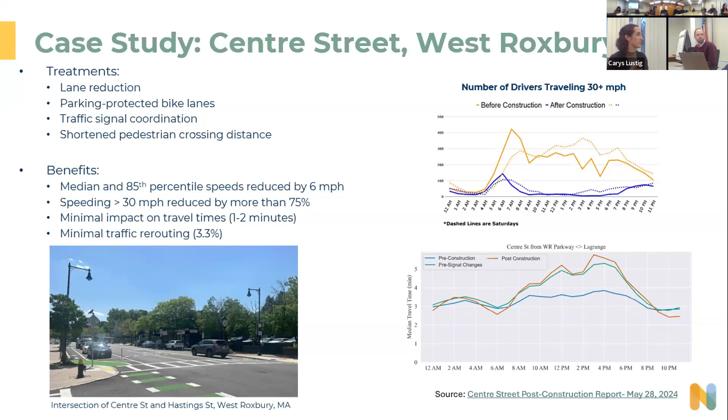So in terms of... sorry, just a question. Yeah, of course. When you were talking about revenues increasing 100%, could you explain more about what they are measuring? I can't give a specific answer right now. We do have a link to the source, so I can get that specific information and share it after the meeting. Yeah, sure. That's great.

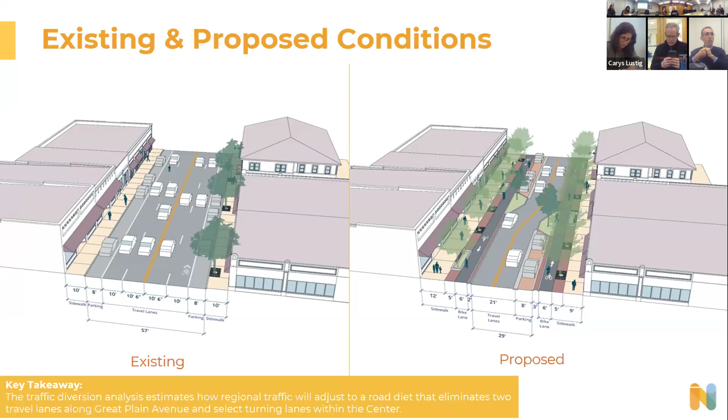Our analysis is based on a number of assumptions. First, that there is a road diet within the center. We're talking about reducing Great Plain Ave from 4 lanes to 2 lanes, one lane each direction, eliminating all turning lanes within the center along all approaches, with the exception now of Chestnut Street, based on our earlier conversations and analyses on the impacts of Chestnut Street being a single lane approach, and the fact that the fire station is right along Chestnut. We're keeping Chestnut as a 2-lane approach the way it is today, an exclusive left turn lane and a through lane.

We are assuming that the exclusive pedestrian phasing will remain in effect in the center. By this, I mean when a pedestrian presses the push button, all traffic at the intersection stops, allowing pedestrians to cross while motorists are totally halted.

We are also anticipating some opportunities, based on traffic signal timings during the pilot, to somewhat monitor and control what the traffic diversion volumes might be. This could be done by altering signal timing, green time, etc., between the different phases. We are assuming that any portion of traffic above the capacity of that approach will seek an alternate route. Lots of things influence this, such as the amount of green time facing that approach, or the amount of friction expected to be encountered.

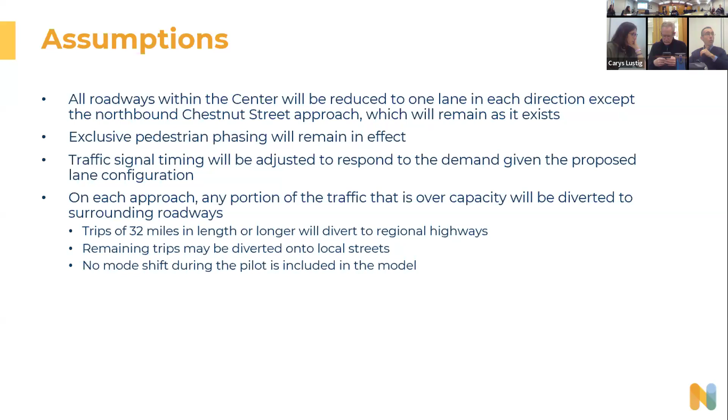So we have a three-phase process. First, we are estimating how many trips we anticipate being diverted from Needham Center itself. Second, looking at the alternative routes those motorists might travel to go around the center. Last is identifying locations along those travel routes to collect traffic data, again before and during the pilot program.

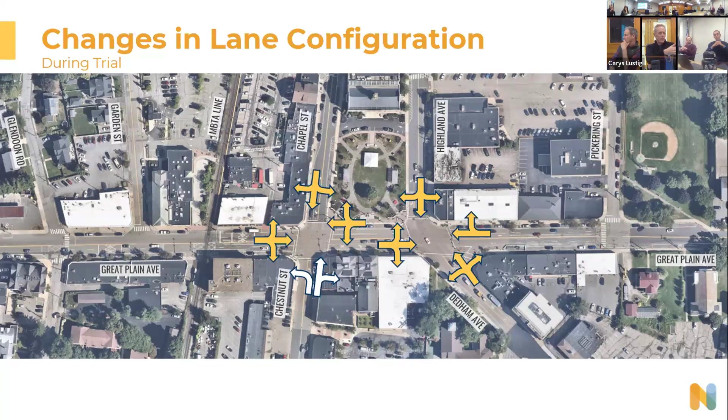What about the idea of doing a little bit of it now, but with a delayed green? So this clears, then they get at least 4 or 5 cars through the intersection trying to turn left before the oncoming traffic basically stops the lane.

I don't know how much more you have to present, but beyond these, it's 2 lanes in every direction. I'd be curious to know that context, like you only go one more block and you're down to 1 lane in every direction, and everyone's making those turning movements. You go 2 more blocks at Webster, and there's 1 lane in each direction. Unless we all agree that doesn't work and everyone wishes it was 2 or 3 lanes wide, that context would be helpful, because otherwise it seems like such a big deal.

Needham is like a functioning roadway network. So that might be helpful for the storytelling aspect of this.

Both Marked Tree and Webster have a lot of left turns there, a lot of people turning left on Marked Tree. Even going one more block in both directions, everyone is already navigating left, right, in, out, four-way intersections. With the exception of one of them, none of these are dedicated turn movements, so they don't have the benefit of being dedicated. You're already having people going straight and turning in the same space, whether it's right or left. And there's no driveway there, we're not dumping 1,000 cars on this one block making these unique. So it actually just gives parity to what everyone is used to. That's what I see when I look at this.

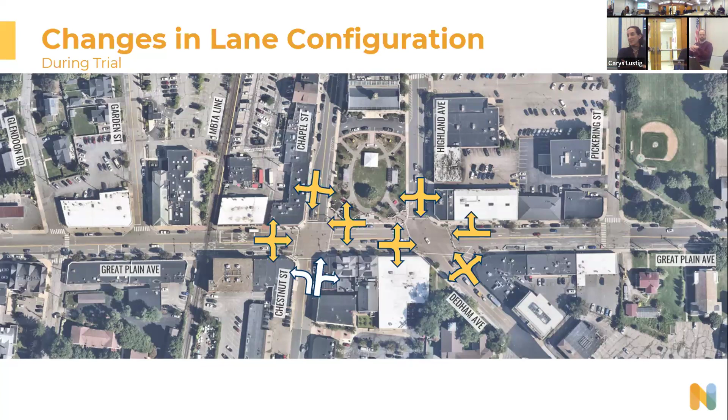So, based on the assumptions that I had discussed earlier, we reanalyzed for the pilot program to understand what percentage of traffic and number of vehicles would be diverted from the center with the reduced number of travel lanes cutting through.

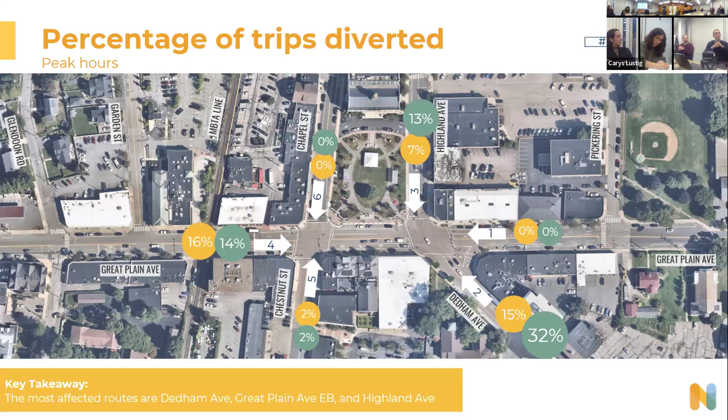If you recall, last time there was a substantial amount of traffic being diverted from Chestnut Street, which is no longer the case. Right now, the greatest percentage is during the evening peak hour. AM is orange, PM is green, so the largest percentage of traffic being diverted from any of these approaches would be 32% during the evening peak hour of Dedham Ave.

And if we look to see what that equates to in number of vehicles per hour, that equates to 32 vehicles per hour. You can see kind of a rebalancing between the percentages and the number of vehicles here. So if we look at number of vehicles being diverted, the most would be in the eastbound direction in the morning, 73 vehicles.

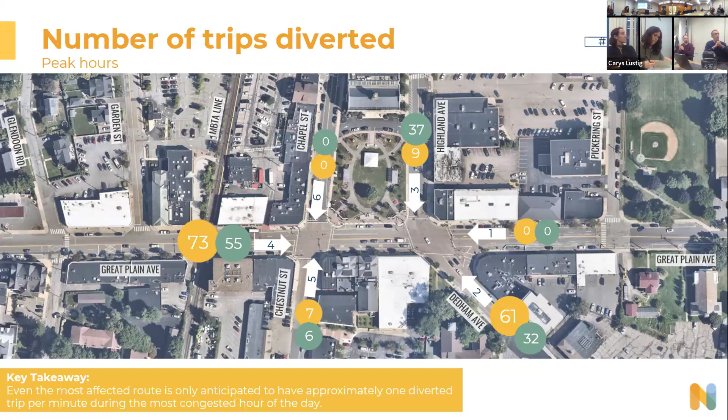Now, what does that equate to? Really, that would only equate to one vehicle every 50 seconds being diverted to alternate routes, of which there could be a number. So in the end, it's not a substantial amount of traffic being diverted from the center. And again, we're looking here at the morning and evening peak hours when we would anticipate things being the greatest, the worst case scenario.

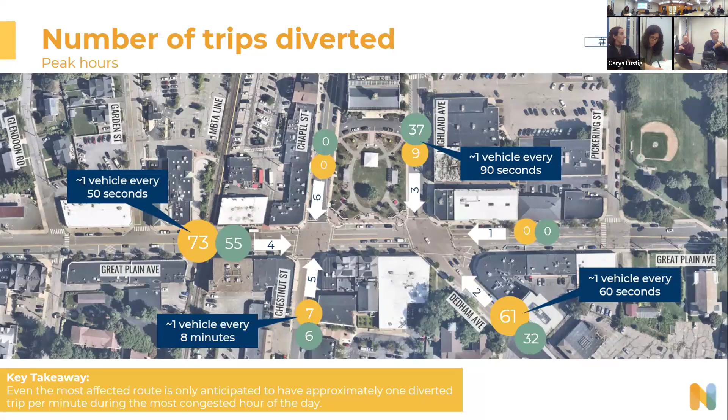Just looking at what the most diverted routes would be, it would be eastbound Great Plain Ave, combining with Highland Ave, heading down Dedham Ave, more so in the morning. Then in the evening, the opposite, coming up Dedham Ave, turning left onto Great Plain Ave westbound or Highland Ave northbound.

Lise, did you have a question?

I did. So I was telling my family last night that I had this meeting today, and I have a couple young adults and my husband, and they just kept going, 'but I don't understand, where are all the cars going to go?' And I was like, oh, we're going down to a single lane, that's going to be a pilot. And they're like, but the cars are coming from Wellesley. And I was like, well, they'll do Route 9. I could not come up with a good answer as to where all the cars would go. And you're saying only 70 cars and only one per 50 seconds. That seems like a lot of cars.

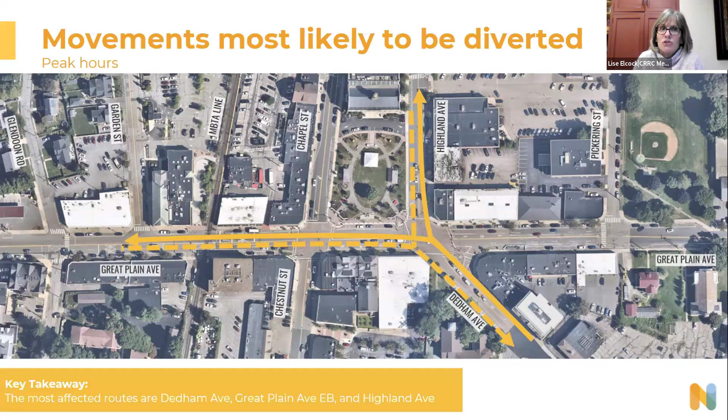And to be honest, I can't believe there's only almost 500 cars coming through at peak hour. So to me, this is a lot of information that I have to try to process. Where are those cars going to go?

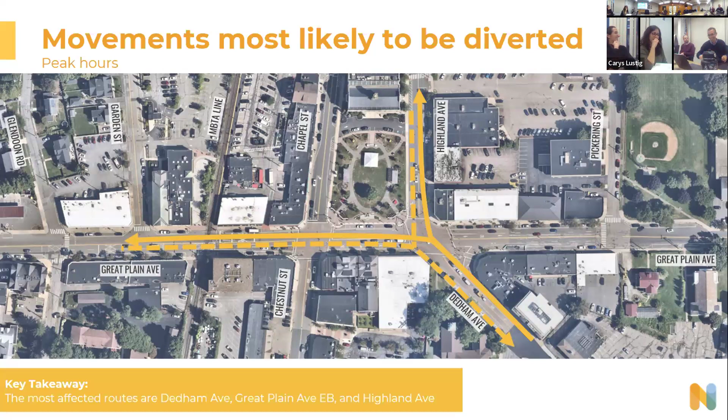Is that the next slide? That's actually a good segue. I swear we didn't plan this. And I need better answers because they're a tough crowd.

Okay, all right, here it comes. Emily, you're up. Yeah, thanks for teeing that up. I'll just say first off, everyone, I'm Emily Koehle with Toole Design. I think Lucy Gibson maybe has been at these meetings in the past, but is on vacation this week, so I'm subbing in to present this information to you. She did a lot of this analysis, and I kind of supported her with some of that. So if you have any questions I can't answer, we'll definitely follow up and get back to you. But hopefully these slides are thorough and we can talk through where all those people are going.

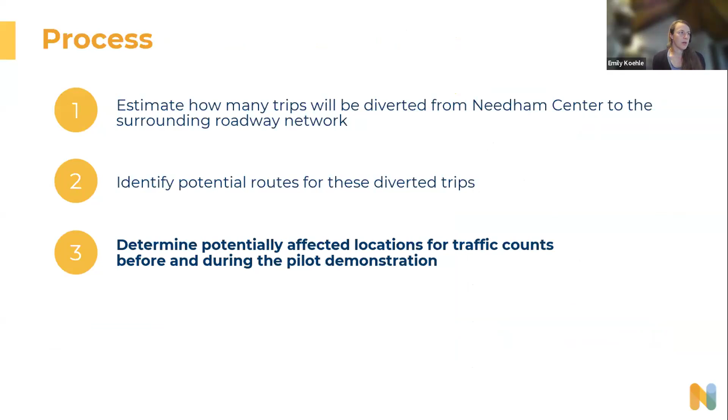That 55% of trips are commute trips, work trips during the AM peak, and then 28% of trips are longer than 32 miles. So again, looking - I think we'll still talk a little bit about the potential routes, but then just noting again that goal of determining the locations for traffic counts before and during the pilot.

So Highland, we're assuming, will have local trips that need to divert. All of the other approaches - all of the trips that need to divert can be from those trips over 32 miles in length, which can divert to those regional highways.

Highland Avenue is the approach that has local trips that will need to divert. Here we're looking at the potential routes for those right turns through and left turns on Highland.

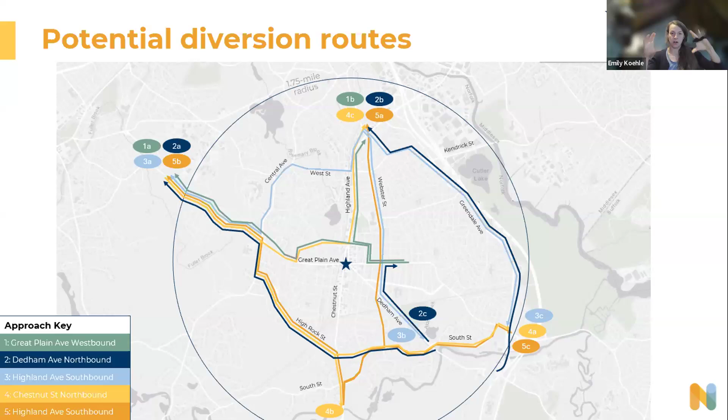We took a look at all of those approaches to the center, thinking through those left turn and right turn volumes, and mapped that here for those more local trips. We used Google Maps to inform some of this, putting our origin and destination on the outskirts of that circle, and estimated where those trips would go.

We looked at things like school locations. I think that was brought up at a previous meeting, that people may avoid driving by the schools. We do have Needham High School there, and the hours of that school overlap some with our diversion routes. But we just put all those pieces together for our assumptions of where people would route to.

Can you just add to the map the Newman School and the Sunita Williams School—is the Eliot School, yeah, the Sunita Williams School outside of this? Just because those are on the bookends of Central, and the hours of the Newman School are different than all the other elementary schools, and that probably overlaps a little more with rush hour than some of the other schools.

Can you also just clarify, when you say divert, what is the trigger again? Is it you don't wait one light cycle? What is the trigger?

So if we're looking at the center itself, what we're doing is looking at what traffic exceeds the capacity of that approach. When we're looking at our traffic signal analysis, it takes into consideration the timing and all the friction along the roadway, so we look at the volume to capacity ratio.

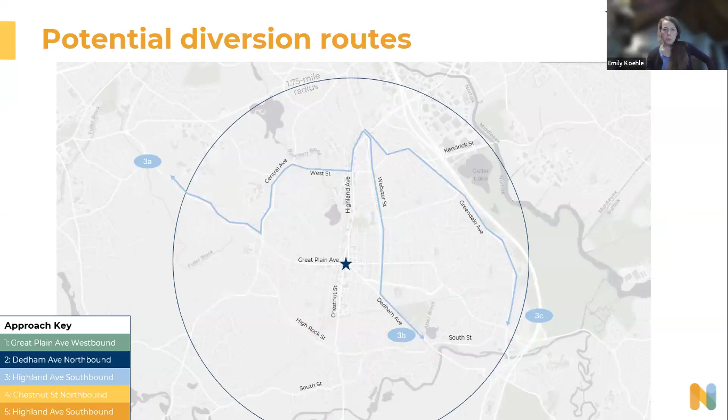I'd like to go back to that one slide real quick—I found it the most interesting, that Highland Ave is the redirected or diverted traffic to focus on because it's more local traffic, versus the pretty high percentage of cut-through traffic we're assuming, given the over 32-mile span that these motorists are traveling.

On Dedham Ave, for instance, and even Great Plain Ave eastbound, the amount of cut-through traffic is greater than the traffic we're anticipating could divert from those approaches. So that's the good news—those alternate routes they'd likely travel on would not be in Needham, since there's that bigger regional redirected traffic. I found that really particularly interesting.

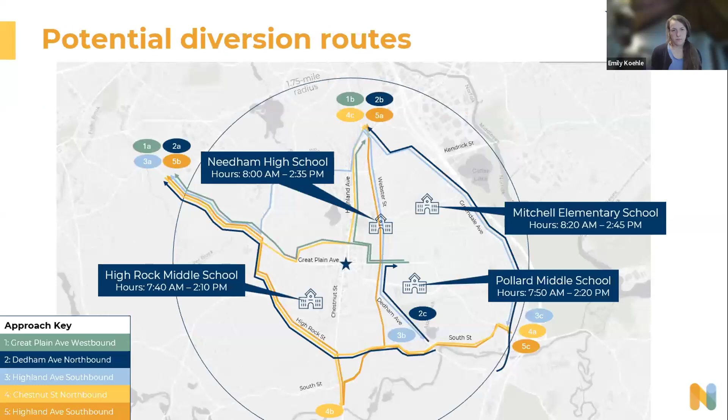So we just have a few points from what we talked through on this summary slide. Reducing the vehicular capacity of Needham Center will likely cause trips to divert to alternate routes, but 10% or less of the total peak hour trips are expected to be diverted.

Many trips are regional commuting trips, as has been expressed. 60% during the AM are greater than 16 miles, 28% are greater than 32 miles, and 55% are work-related trips. Knowing these are longer trips through the center, there are viable routes on regional highways, very dependent on what's going on those regional highways. If there's a wreck or a crash, or some other reason those highways get backed up on a given day, that can change what those travel patterns look like.

The degree to which drivers change their behavior will influence which roadways are impacted and by how much. I think the purpose of this is to identify locations to monitor, which can really inform the final mitigation efforts. This isn't an exact science, and I think it's a really exciting opportunity to do this data collection before and after. We'll continue to monitor that and recommend ways to mitigate the increase in traffic.

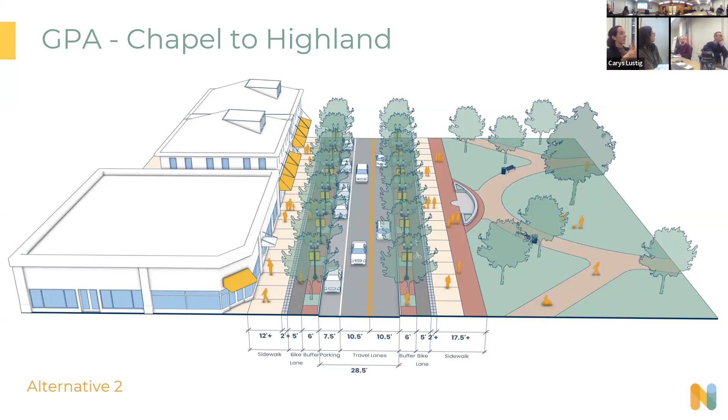Alternative 2, on the other hand, had the amenity zone right next to the roadway, so the streetlights, trees, parking meters, benches would all be co-located within that one zone. The bike lanes would be on the outside, separated from the sidewalk by only a textured pattern with no physical objects in it.

Feedback we got on these 2 alternatives showed a pretty clear consensus for alternative 1. Folks thought people would be more comfortable having that physical separation between biking and walking. Tyler mentioned last time that having the street trees closer to the storefronts would provide a better experience for patrons of the businesses, and having that amenity zone closer to storefronts would be more useful for businesses in terms of benches or other things that could be used.

Other feedback for this block: the original sections we proposed had a very wide sidewalk on the north side. Because that's already abutting the town common, the need for a very wide sidewalk there might not be as great as shifting the right-of-way space to the south and having an even wider sidewalk on that south side. This section had held the location of the roadway center line, which is why it was separated out that way, but we were looking at shifting the roadway center line to the north to provide these extra amenities beyond the roadway while still widening that sidewalk.

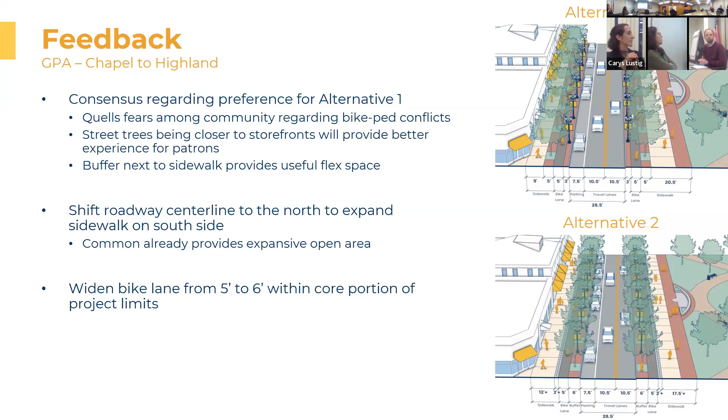Next. The next section, oh yeah, thank you. The one on the server doesn't have it - it's all right, just keep going. We will share after this meeting some updated sections that incorporate the feedback, or Cassandra can pull it up.

The next section we showed was Great Plain Ave to the east of the town common, from Highland to Pickering. The 2 alternatives we showed - this one has parking on both sides of the street, with the exception of some isolated bump outs.

Both of these sections do show the bike lane separated from the sidewalk. This one has narrower sidewalks—you can see there are 6 feet on either side. We still have that 5-foot amenity zone, bike lanes, and moving in from there.

The second alternative shows a horizontal shift in the roadway, which would allow for parking on only one side of the street at a time. Doing this approach does allow for considerably wider sidewalks, so 9 to 10 feet. The rest of the section is the same as alternative 1.

So the consensus for this section was not as clear. Some of the feedback we received: for alternative 1, a benefit to some is that there is more parking retained. And there was some feedback that even though it doesn't provide as much traffic calming as alternative 2, it's still a substantial amount of calming from the existing conditions, and maybe that's enough.

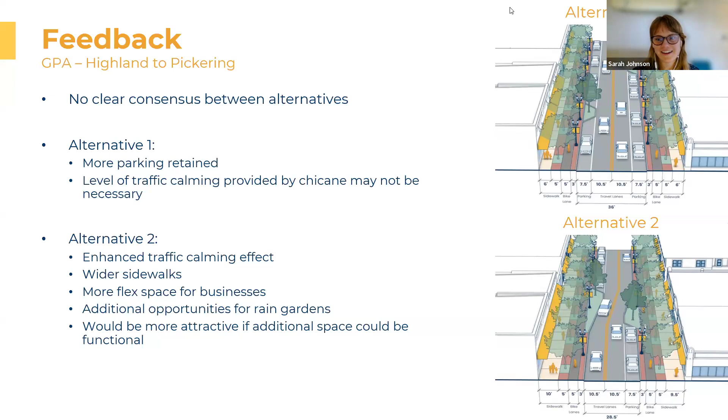In some places it just varies, I think. Your outdoor dining is actually set up quite well compared to some really shoddily constructed outdoor dining during COVID, where there was a lot of conflicts and accessibility issues. Just wanted to get your thoughts.

I think we haven't had the option of anything else, so that's why the setup is the way it is right now, as far as... actually, I'll take that back. French Press is the place where we had the wide sidewalks. But that was one of the few places that had a restaurant and a wide sidewalk.

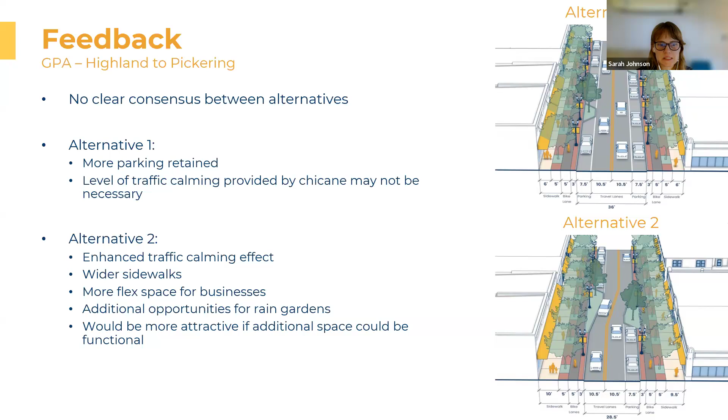I think they had it on both sides, right? They had it in the parklet and adjacent to the building. Eventually we did make the choice - I saw other communities use their parking spots for pedestrian diverting and had it up against the building, and we chose not to do that. We chose to keep the pedestrian space the way it was and redirect the businesses to the other side. That's actually what I was referring to as not great choices made by some other communities.

I think maybe it's probably more of a conversation with - I'm trying to think - the planning board should probably be part of that conversation as well, just because they're the ones who did a lot of the zoning around the parklets, to find out why they made the choices that they did.

Because I've seen other designs where they've done it specific to a specific retailer, and then that retailer goes and it just doesn't make sense after that.

Do restaurants pay for the privilege of the parklet and the sidewalks? They do, so they pay a fee, but I don't know what it is right now. They didn't for the first couple of years, because that was like an emergency measure to keep those businesses functioning. But once the COVID restrictions went away for capacity, it became a permitting process where they basically rent that parking space.

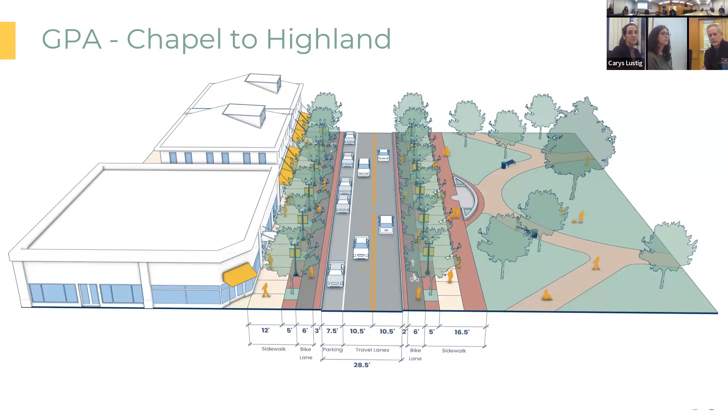And the other part we observed in the downtown is that we have trees on the side of the street where the sun is, and no trees on the other side. So maybe the consideration is that you bump out the side that tends to get the most sun, because that's where people would most want to sit. And with the trees, it tends to cool it, but people always want to sit on the sunny side of the street and not in the dark, which tends to be colder. So that might be a consideration for you to choose.

All right, and then lastly, this is a new section for the western portion of the project limit, so from Nehoiden to Chapel, this is the existing conditions.

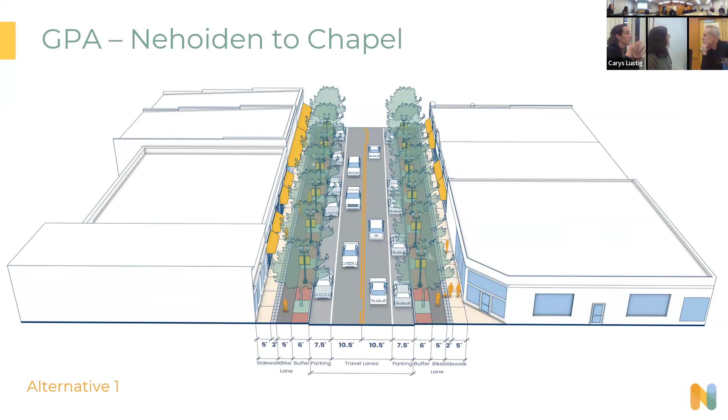Alternative 1, you can see this is a more constrained right of way, with a 6-foot amenity zone, then the bike lane next to a minimal sidewalk of 5 feet. This would have parking retained on both sides. Alternative 2 reduces the parking to one side, and with that change we have wider sidewalks at 8 to 9 feet, and we're able to shift the bike lane closer to the street, similar to the block to the east of here.

So was one of the considerations that—here it looks like, well, we have column A and column B, right? But there are different considerations in terms of making all the bike lanes actually connect and intersect. So, I mean, can they shift both horizontally within the intersections to have a path throughout? But yes, having it be a straight path would be preferable for sure.

Keep going, Cassandra. Do you mind going back just quickly? What was one, because parking on two sides—is there a reason why it wouldn't mirror Pickering to Highland? Chicane, is it just that there's not as much width? I only ask because on the other one you show a little bit of parking on both sides, and the loading gives you the option for 15-minute loading. Whereas this one has the rail crossing, which we thought the chicane would complicate.

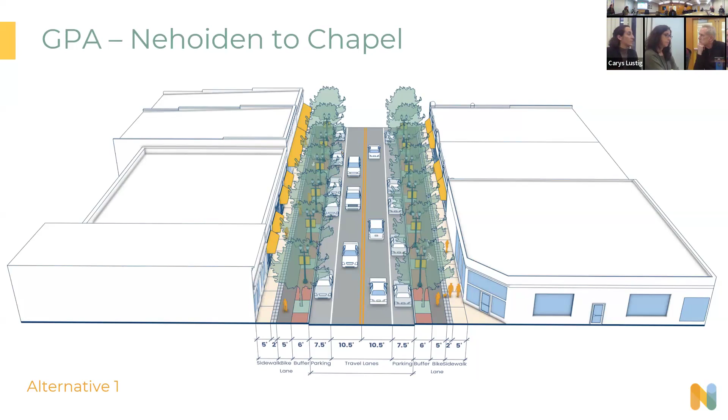So, can you go to the timeline?

So we're kind of working towards the next public open house. We do have that virtual engagement, which is more informational, about the feedback we've gotten to date and the traffic study. But just trying to look to next month, thinking through how many alternatives we'd be comfortable presenting to the public. I always like to have at least two, so people have a choice and can give pros and cons of each.

Our thought would be to present both options that we presented for each block, and present them as objectively as possible, and let people come to their own conclusions and give us that feedback so that we can move forward. Is there a way, without getting overly complicated...

The part that I think is going to be difficult for people to get perspective on is what the continuity is. Yes, so to that end, have a version that's linked together - we did this with the wide sidewalks, showing what it would look like in this configuration. For the open house, we are planning on having plan views of two holistic alternatives. So to that end, we are proposing to shift the timing of that open house to after the school vacation week, so that we have at least one more working group meeting to talk through that holistic plan view, and make sure we're aligned with what's being presented publicly.

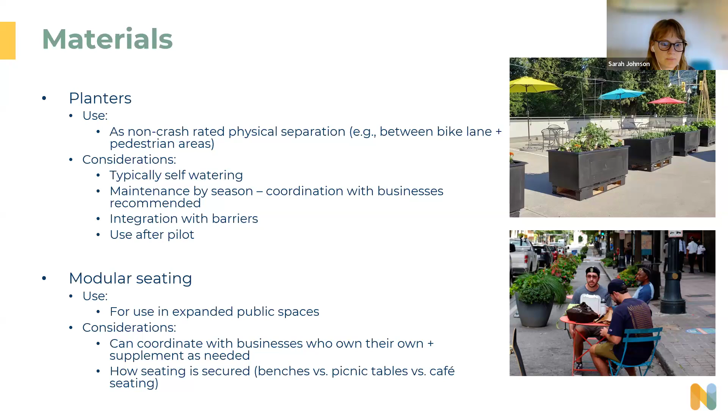That would be for the expanded public spaces. We'd need to consider how it's secured, if that's something people feel would be an issue. There are also places where businesses have their own furniture, and they might enjoy being able to spread it out more to get space between tables. That's something we'd want to work with those business owners on.

Bike racks — we heard there's no bike parking, and we saw there isn't a lot of bike parking in downtown. So that's something that can be fit into some of these created spaces. We'd want to think about how the bike racks themselves are secured — you don't want a really short rack that only fits four bikes that someone could pick up, rack and all, at once.

Then we have fun, playful elements like sidewalk stickers, which are great for keeping people informed or providing wayfinding. If we're talking about how to find nearby parking, even something on the sidewalk helps key people in — like, 'oh, I didn't know that was around the corner' — and when they're driving, they'll retain that in memory better. There are other fun and playful objects too, like impromptu seating from tree stumps, or big flagstones that create almost a hopscotch effect for people to meander and interact with downtown.

So this is just a big overview of different types of materials — and those are all kind of vertical elements.

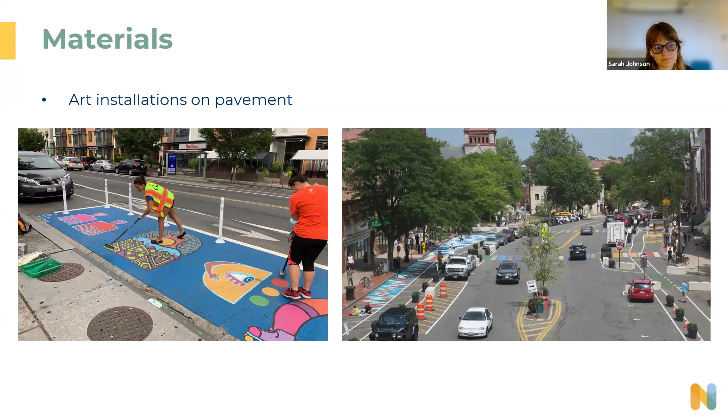We will share updated slides with the latest typical sections as soon as we have a plan view that pulls it all together. We'll be sharing it with you - just want to make sure it's well thought out and ready for your eyes. Please email any additional feedback you have, it's been incredibly helpful. In terms of other things you can do to help, spread the word about the upcoming virtual events, again April 3rd and April 5th.

Start having those lines of communication with folks who would be interested in helping out with the art element of the pilot - would love to start that sooner than later. If you have any ideas of people who'd be interested, we can start a contact list. I'll also add, on the planter side, I love the idea of more greenery downtown, and that's one of the things we've been talking about.

We don't have a plan or program from a town perspective as far as maintenance goes. It used to be there was a local landscaper who did a lot of that for us - he has since retired, literally sailing around the world.

I do believe the Needham Garden Center has kind of taken on that role in a lot of ways, so it's possible to reach out to them to see if they might be interested, especially if it's just for a pilot and not a long-term commitment.